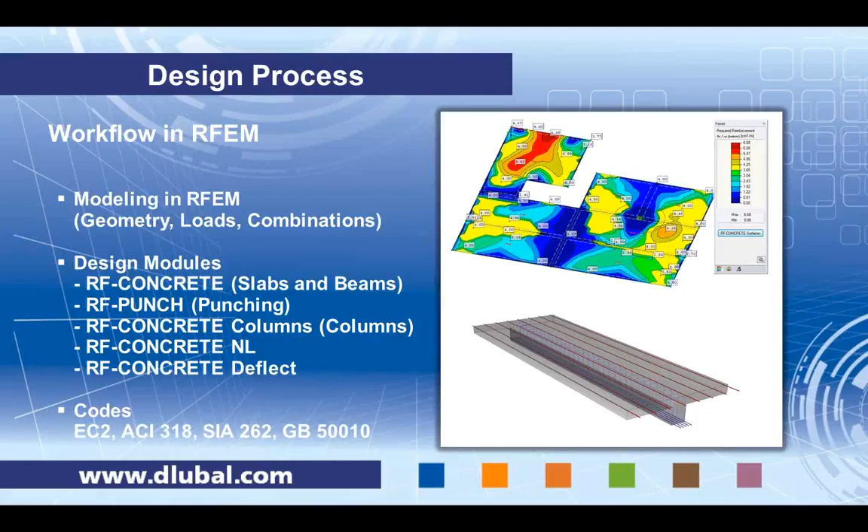In the concrete design modules, we have the following codes available: Eurocode 2, ACI 318, which is the American code, SIA 262, which is a code from Switzerland, and GB 50010, which is a Chinese code. Other codes are in preparation and will be published on our website when they are available and finished.

I would like to go now into the demonstration of the module itself, in a live demonstration in the software.

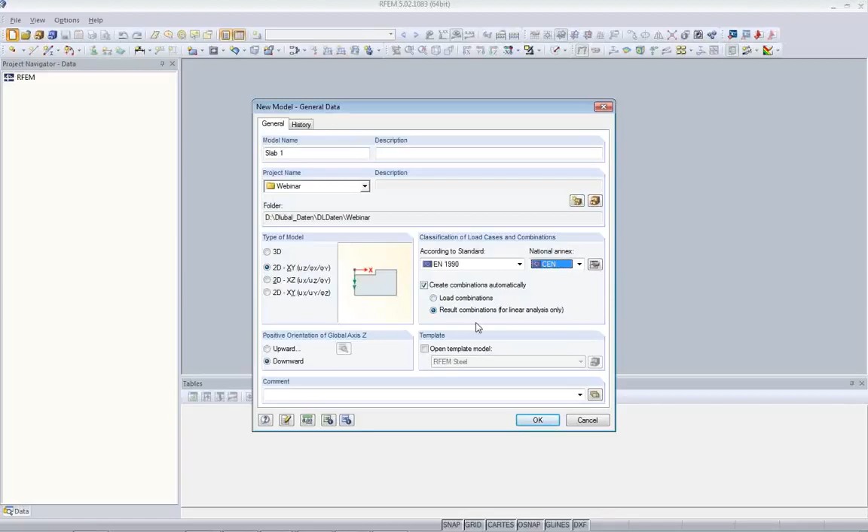To do this, I open a new structure inside RFEM, and I'll have to enter a model name. It will be a 2D model, according to Eurocode EN 1990, especially the loads will be according to Eurocode EN 1990, and we'll use the general settings for the national annexes throughout this project. We'll create combinations automatically according to this code, and we'll create result combinations, which are linear superpositioned results of the individual load cases.

Now I can import the background layer. Either you can use File, Import, and you see here DXF format, import as background layer, or you can also go to the Data Navigator and use the Guide objects, where you find background layers.

Right click on it and create a new background layer. I'll import one DXF file I have prepared here as a background layer, and you can name it as you like, sketch from CAD.

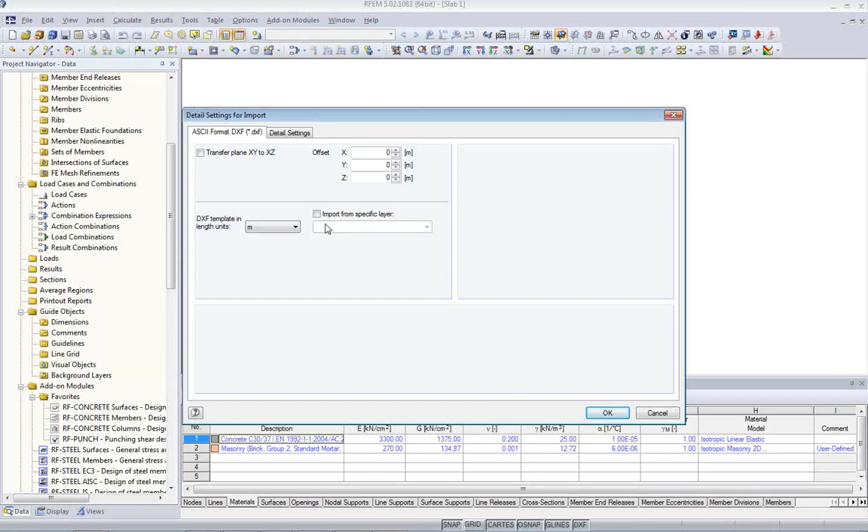You also have the option to import from a specific layer that you can select here. You might have drawn already certain lines inside your CAD application that you might want to use for your boundary lines or surfaces, but in this case I import all the lines that I find here. I click OK, and you'll see the outlines of the slab already in the background.

These are not real lines. I cannot touch them at the moment.

Now the situation is such that my actual structural system will not go all the way to the end of the wall or to the outside of the wall, but may already end in the center of the wall. Often, as the structural boundary, we use the center or middle of the wall where the slab is placed.

So how do we do this? I can now use a tool called Set Parallel Line. With this Set Parallel Line tool, I can create a line that is offset from a line that I pick in this background layer. The offset I use here is half of the wall thickness, which in this case is 18 centimeters.

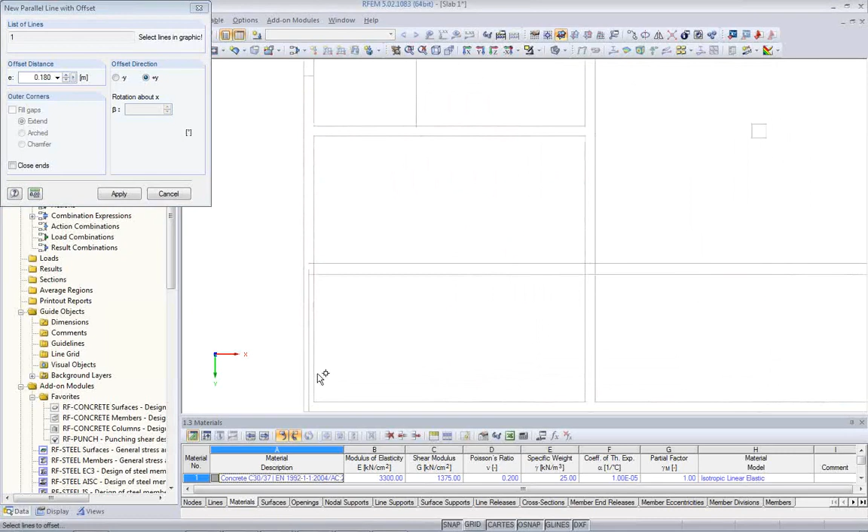Now I can start clicking on the line, and you see in the center of this wall a line is created.

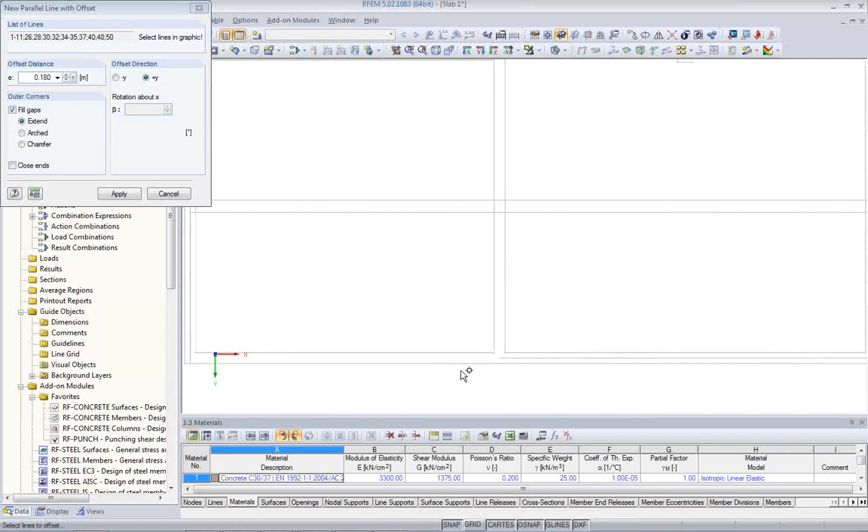I can now simply click on all the wall edges that I have in my template and go around the slab here to quickly grab the geometry of the structure from this background layer. So I do not have to use any printed plans or manual drawings, calculate coordinates and so on. The software is helping me here.

One more here, and then I have a pretty good idea of my slab, so I have to make a few more adjustments. For example, here my drawing wasn't that good, so I can enter manually a line. I can snap to the existing nodes and create a perpendicular connection here. I don't need this line anymore, so I can just drag and drop the neighboring node there.

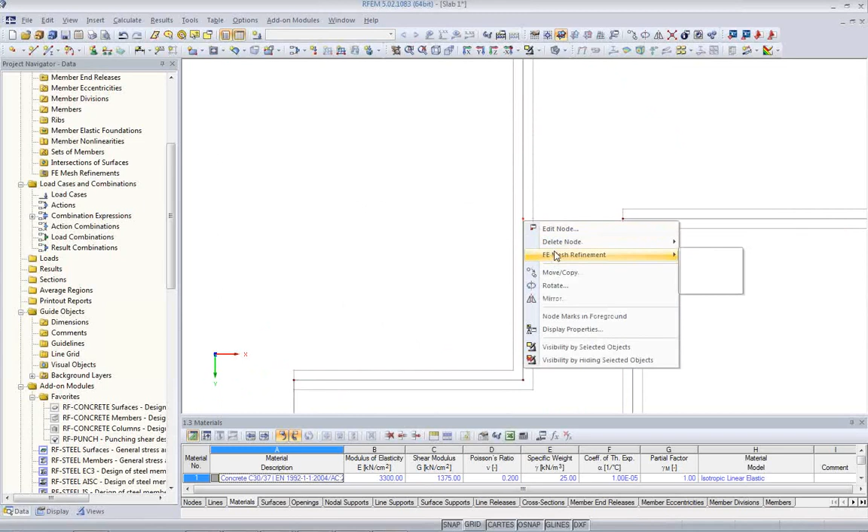So with a little bit of manual work, I can fix up my model here. Here also I'd like to have a perpendicular connection. I just drag and drop it to the next line and fix my holes here. Okay, here maybe there is a node that I don't like to have. I can delete this node and merge the joined lines or members, so out of the two lines, one line is formed.

Here again, I'll fix the little problems. This node I need, this node I need. Here it is all - there's a slight inaccuracy which often happens when you work with DXF files. So we can fix this very rapidly with the tools that RFEM provides.

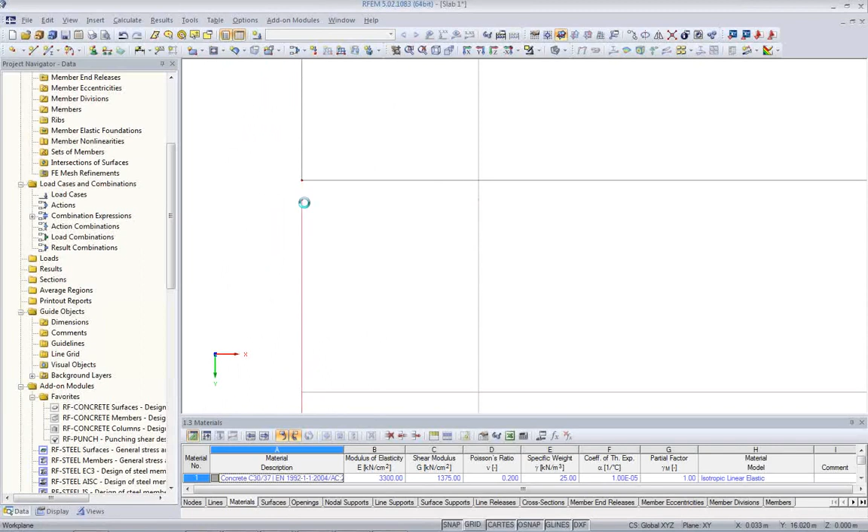Okay, here we need a little bit. And one more situation here. And we're almost done. Again, here there is some inconsistency.

One other thing is I have here certain rooms or offices where I would like to apply loads in separate load cases. So it's a good idea to create not just one slab, not just one surface out of this slab here, but create one surface for each room. That's why I create here a few more lines so I can draw basically my rooms... maybe I do it the other way. Hang on. So I have the correct boundary lines for the surfaces.

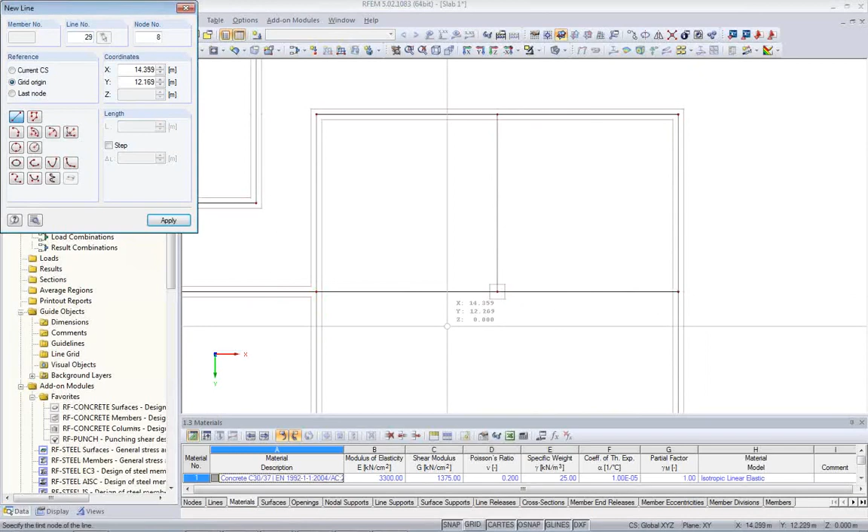Here we go, so once we are done, I can maybe delete this one node here. Once we are done, we can hide our background layer, and we can just either delete it, or we do not have to delete it - we can go to the display tree and just hide it. There's guide objects as well, and we just hide the background layers.

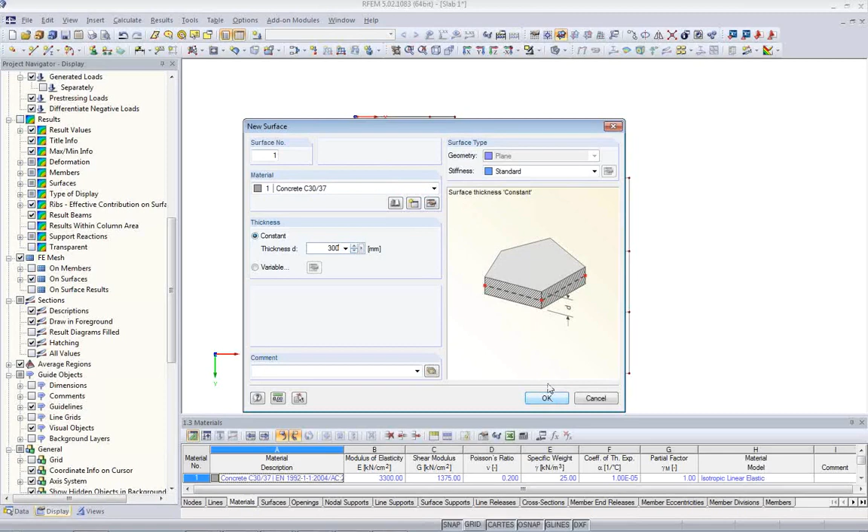Next, we'll have to enter the surfaces themselves. So I select the boundary lines. I have here already in this model a couple of materials - I'll use concrete C30/37. Of course, I can always pick something from the library that comes with the software. The thickness should be 300 millimeters, and it's a standard surface type.

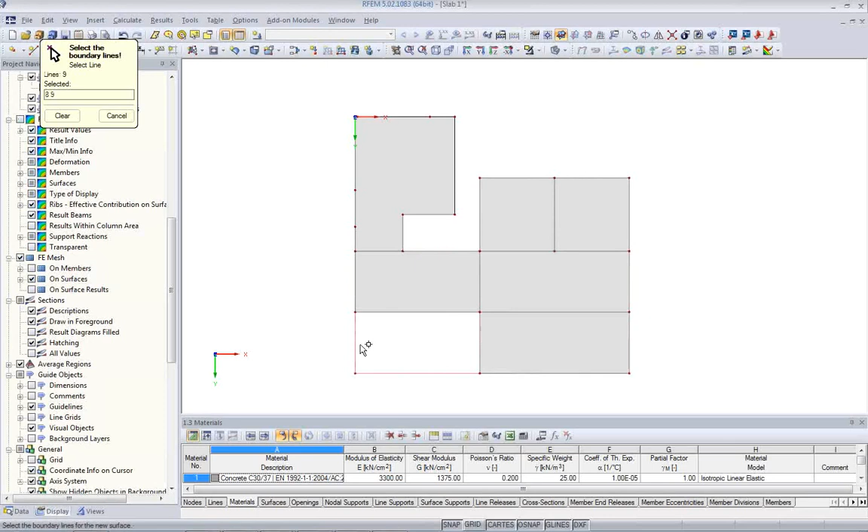I'll click on the boundary lines and quickly enter my surfaces one by one, and each surface represents one room that I might want to use later. Here we go, and we are done with the surfaces.

Next, we'll enter quickly the linear supports from the walls. I can either enter a rigid linear or hinged linear support, or as a specialty in RFEM, I can use a so-called elastic support via wall. This tool automatically provides the stiffness of the wall, and for this I have to enter the dimensions of the wall - the thickness is 360 millimeters, the height is 3 meters.

The material of the wall I can pick here, for example, from masonry. RFEM has in its library also the option to create certain masonry wall types made from brick and composed with mortar and all the parameters that Eurocode uses. So it's a lot of parameters you have to use in Eurocode to get the correct material parameters for the masonry used in the wall. From these parameters I can create the modulus of elasticity, the shear modulus, and so on that I need for an analysis.

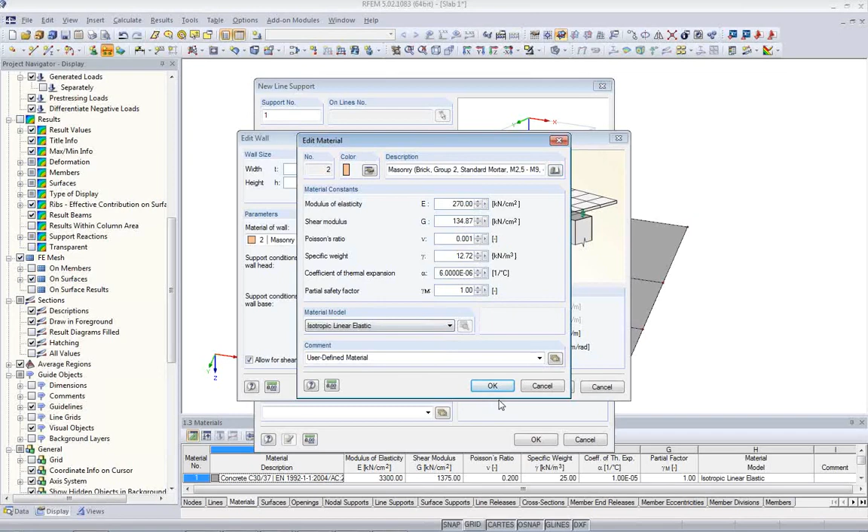I'll use a linear elastic material law for this, so I'm not using a nonlinear masonry material model. I also can address the support condition of the wall on top and bottom, and I will choose the hinged support condition. I see as a result the stiffness for the vertical support created from this wall with the specified dimensions. Next, I'll just click on the lines that are supposed to be supported - this one maybe not, I can erase it later.

And one more here. Okay—accidentally I entered the support as well here, I'll delete it.

Next will be point supports, nodal supports. I have a column in this area here, and here I have an equivalent way to do it. There's also the option to select column, and here I have to have the dimension of the columns, the height of the columns, and the material. This time I stick with concrete.

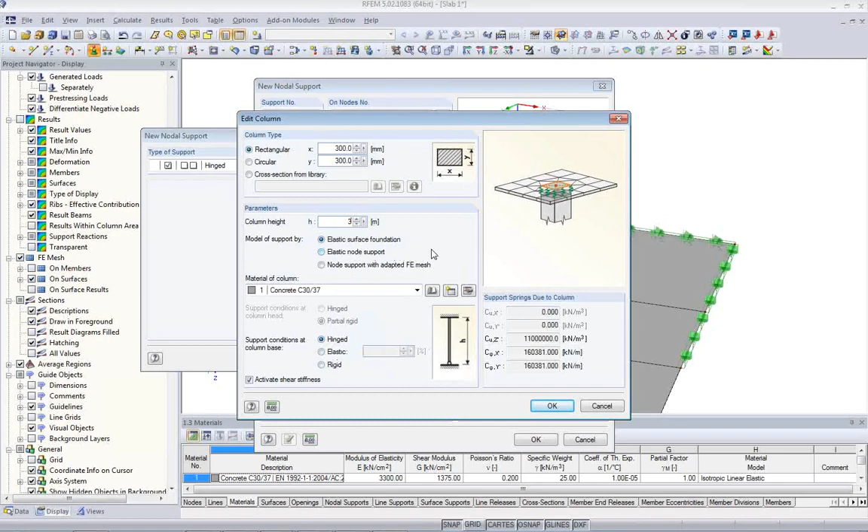It should be also hinged, and I can model it as an elastic surface foundation. That means basically the software uses a 300 by 300 rectangle for an elastic support underneath the slab, and this is a better model than if there would be just one node connected to the surface model. So we have a more a small area that is elastically supported, and that will help to avoid singularities later on.

Also at the same time, it will not show any results inside the column, which is more or less the column material, and it doesn't make sense to make a design there. And I get design actually at the edge of the column.

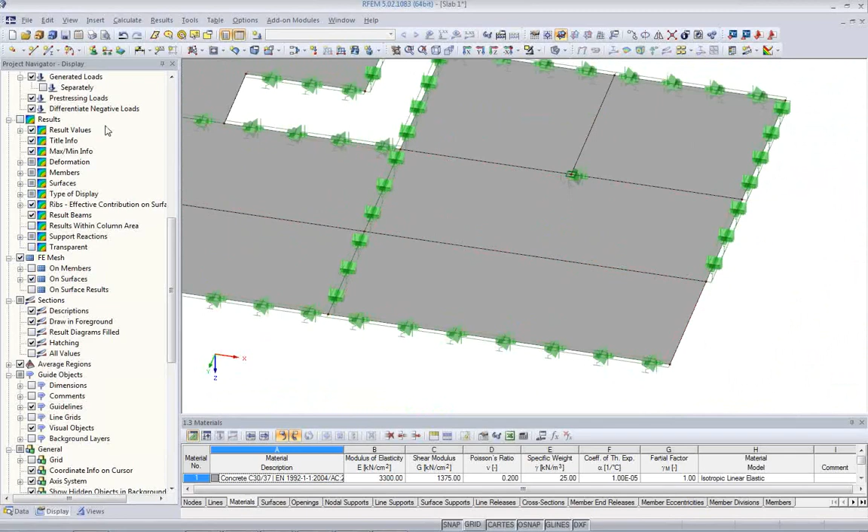Okay, I forgot to have a support here, so I quickly—actually I can just drag and drop it, Control and left mouse key pressed, and then drop it to the next neighboring line. So now everything seems to be all right.

And we are about ready with the model. Finally, I need to enter the beam that helps to support that wide span here of this surface.

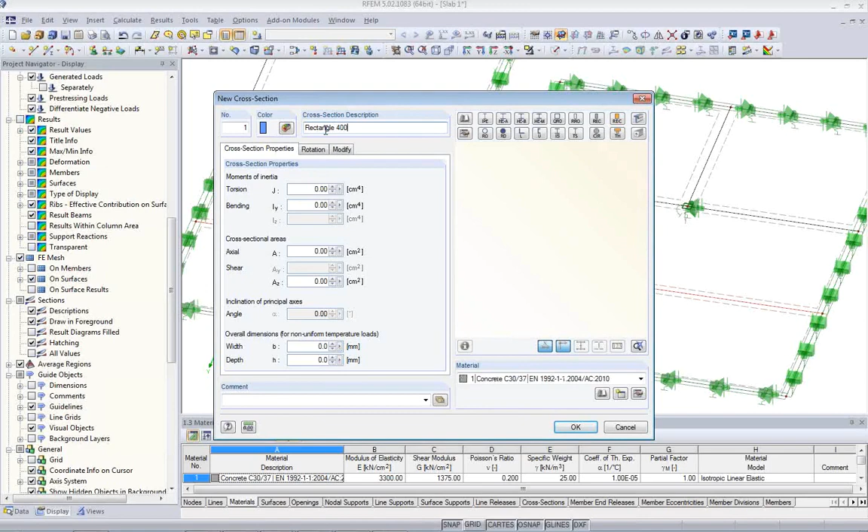For this I select the lines, enable or make a member available, and for this I need a cross section. I enter here rectangle 400 times 600, made from concrete as well.

And as a specialty here, I'll create a so-called rib. A rib will place the cross section, the rectangle, below the surface, and I can control it here with these radio buttons. Now the position will be on the plus Z side of the surface.

At the end I will get internal forces from this beam composed of the part of the surface and the beam itself, the rectangle cross section below. And I have to specify the effective width of the part of the surface, and I can do this here with the effective width on both sides.

So the software will then integrate the internal forces in the slab into 1D member internal forces together with the beam, the eccentric beam that is located below the slab. We will see the forces then later as beam forces, and we will also design this T-shape in the member design of RF Concrete Members.

I can also take control of the rigidity, stiffness of this part, of this beam part below the surface, because in cracked situation, the torsional stiffness of the beams are reduced pretty much. Often in standard practice it is so that you reduce the stiffness of this beam when you analyze the internal forces. I'll leave it here for 100%, but I just wanted to let you know that you have this option.

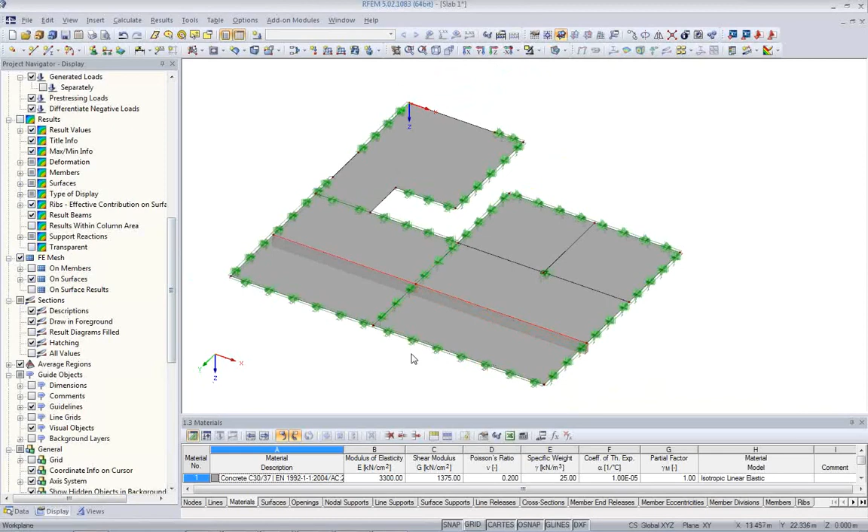First of all, I'd like to show the numbering of the lines and of the surfaces, because those will then also show up in the tabular output of the printout report. And I'll print this picture to the printout report.

This should be maybe 50% of a page, and I'll click on OK. And the printout report template I'm going to use will be from one that I prepared before, RF Concrete 2D.

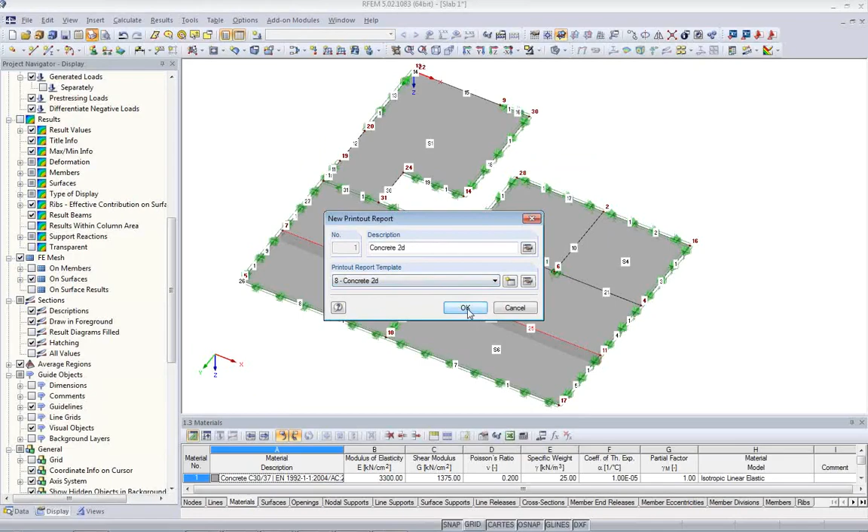We see a short preview of the printout report with all the tabular input and the picture that we just printed. So everything that I entered now is here already in a tabular format, and it's documented for checking later on. You can maybe zoom it to 2 pages, which gives a very compact view of the printout report.

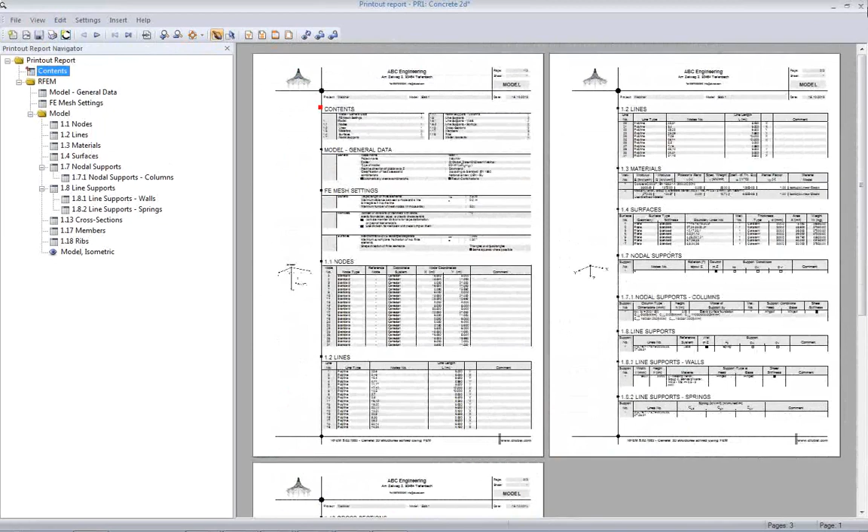Okay, once it's created, I close it again and I save it. Next, we'll have to deal with the loads and load combinations.

I can do this either here, create new load case, or I can do this in the tables. And in the tables, it's maybe more simple because I can just work like in the spreadsheet type, and it's quite quick. First load case is self-weight.

Second load case is some live load, and it has action category imposed office area. It will always remember the last input, so what I have to do now is just enter quickly the other 8 loads. We have 7 surfaces, 8 load cases in total.

Okay, after this I have the next table which will sum up all the load cases in so-called actions, and I can select which design situations I would like to work with. For this example, I will use the ultimate limit design situation and the serviceability design situation, which is the quasi-permanent combination in Eurocode. After that I get action combinations. Load combinations will stay empty because we work with result combinations.

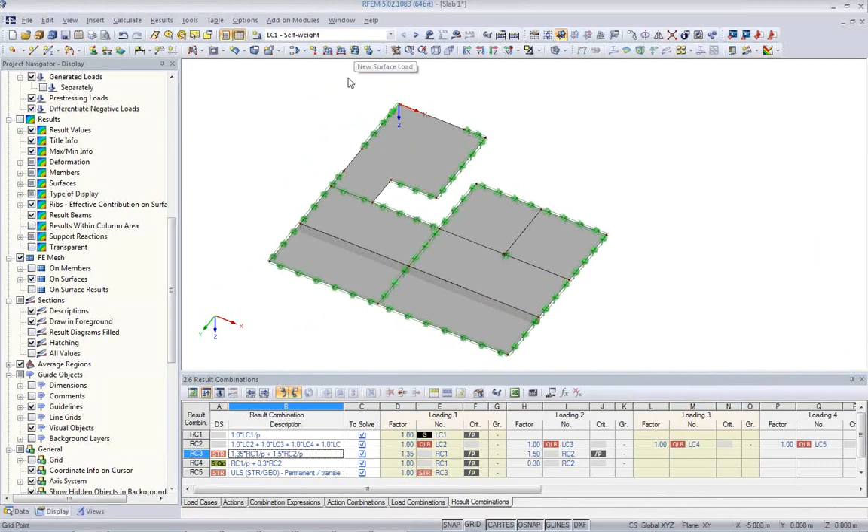Next will be the loads itself. We'll create a new surface load for the self-weight load case, 2.5 kilonewton per square meter, going to all the surfaces. Next will be the live load, 3.5 kilonewton per square meter on each surface individually per load case. I can just change the load case while I'm still in the entering mode of the load itself, so this way I'm rather quickly entering those load cases.

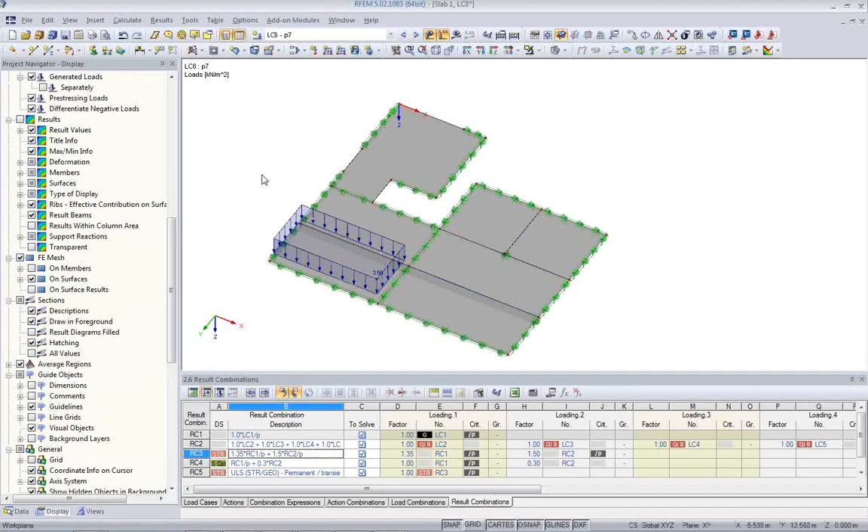Last but not least, I will take a look at the mesh generation parameters before I run the calculation. In the mesh settings, I set a target length for the finite elements of 500 millimeters.

If I work in a 2D plate XY structure, I have an additional option that allows me to make a finer mesh along the edge of each surface, and you can control it with this parameter here. This is a good idea because where I have the linear supports, mostly at the edges, I have large gradients of stresses, especially for shear forces, and it will somewhat condense those extreme values closer to the edge, inside of the wall.

And they will not be disturbing the design later on in RF Concrete Surfaces so much. Okay, and I do one more mesh refinement that will be done in the area where I have the point support.

Here I can just select the node, right mouse click, finite element mesh refinement. I create a new one. I'll use a rectangular type, and I'll take over the default parameters which fit very well to the dimensions of the column, with 0.5 meter at the moment.

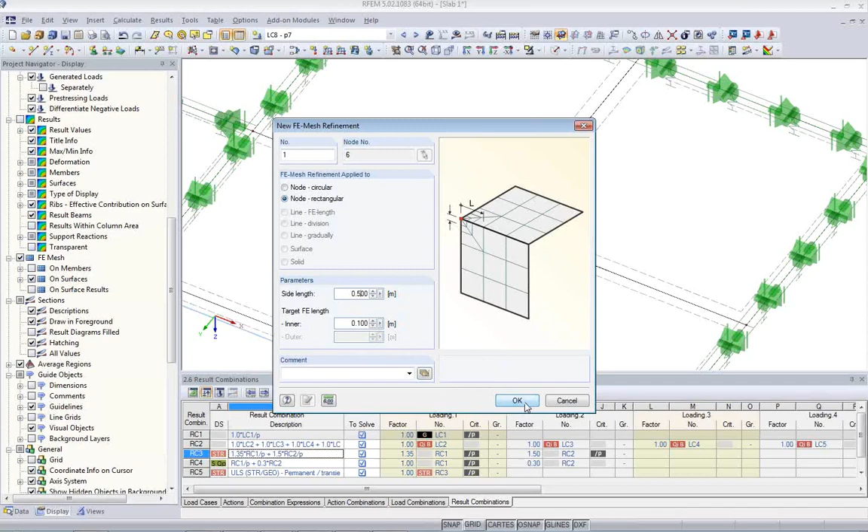Inside there is a finer mesh, and on the outside there will be actually the target length of the global FE mesh that I just said before. So there's a good transition from the finer mesh to the global target length of the finite element mesh.

Okay, with this I can start the analysis, so I can calculate all the results. Mesh is created automatically in the background, and I'll see for each load case now first the deflections.

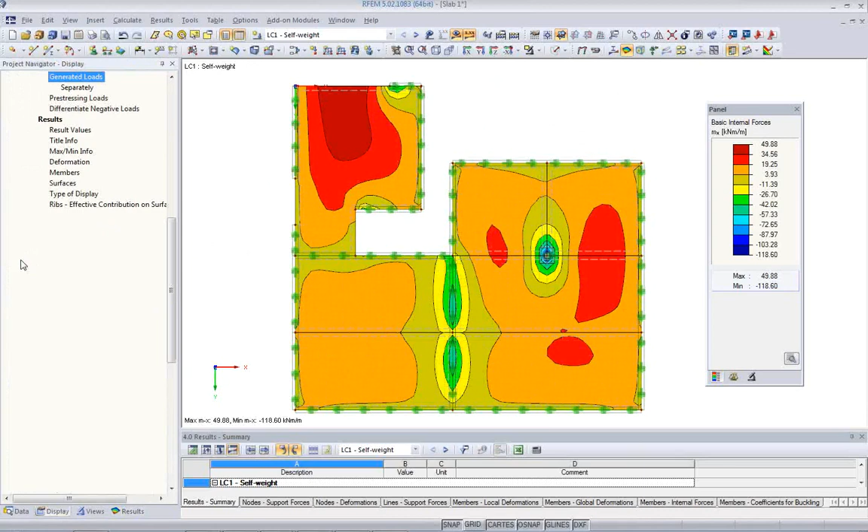I can also view the internal forces, maybe in the top view. I can now also control, like if I want to see the finite element mesh or not, if I want to see my supports or not. I can maybe hide the support lines because I don't want to see them now.

I'd like to see the results. Okay, this picture now is good for documentation. I need my internal forces to put into the document. So how to do this?

I have here the panel that indicates the magnitude of the forces, and how to do that. I can print and use the mass print option. In the mass print option, I scale it to 50%, and I have the option to control the results of maybe selected load cases.

Maybe I only want to see my final results, the ultimate limit and the quasi-permanent results in the envelope. And I click OK, and I want to see MX, MY, MXY, the shear forces, everything I want to have in this protocol. On OK,

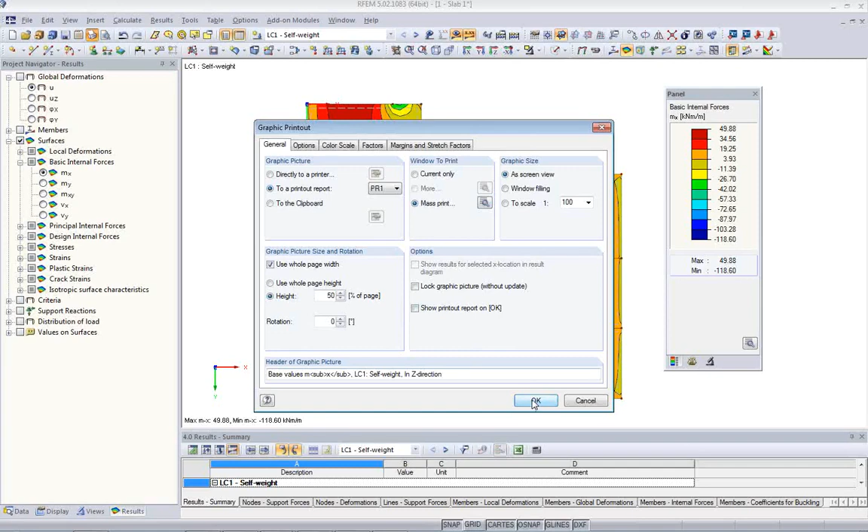I then check show printout report, on OK. I disable it because I don't want to always open the printout report. I just will drop it in my final printout report. And I click OK, and RFEM then dumps it into the final printout report.

Also of interest is not only the surface internal forces, but also the support reactions. I enable them here, and you see that you can't see them because they are drawn below in direction Z. How to fix this problem?

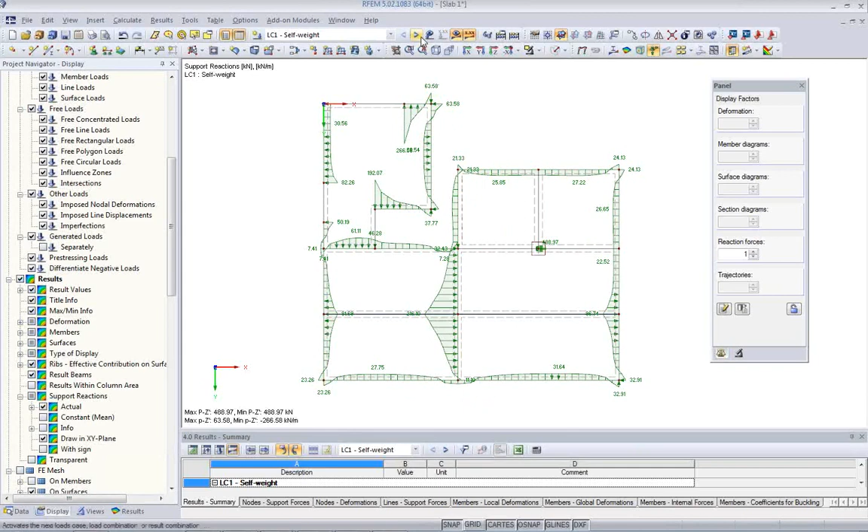RFEM has a specialty that for 2D surfaces, it can display the support reactions. It can draw them in the XY plane. So I can kind of swap them over, and then I see the support reactions here in a much better view.

Often engineers do not work with the real lines of the support forces because when there is a masonry wall, the force transfer is not one-to-one from the support of the slab down to the next wall below. There's some kind of distribution depending on the stiffness of the material used for the walls. So in many cases, it's also suitable to work with smoothed, mean, constant forces.

So what we do is we integrate all the support forces along the line and average them to a mean value. This is a good way that you can use this information also for a load on the next story that you have below.

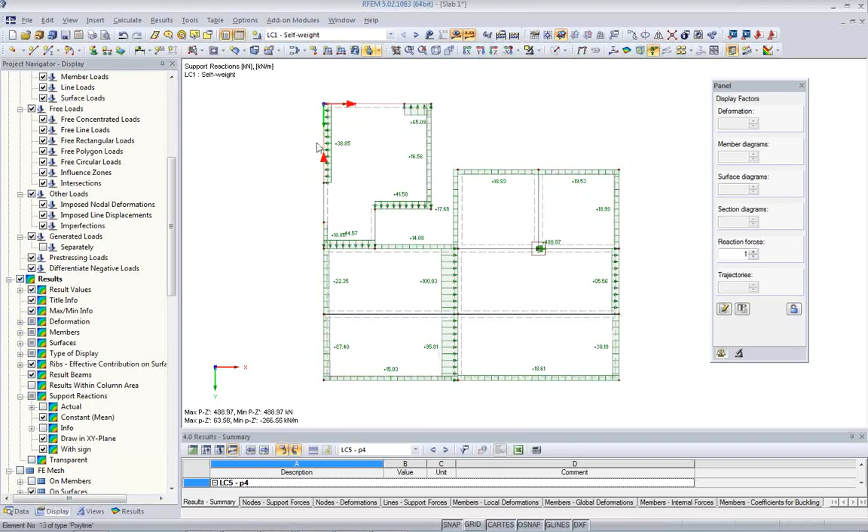So this type of picture I would like to print also in the printout report. I use again the mass print option. I'll click on detail setting, results, and this time I'm enabling the support reactions and local P-Z' reactions, line supports, and also the nodal supports.

I don't want to do it for all the results, only for the individual load cases, because when I keep on calculating with those forces, it's a good control. Also, I might have to apply different safety factors, so the result combinations really don't help me much if I print them. All images of all load cases are printed in this way.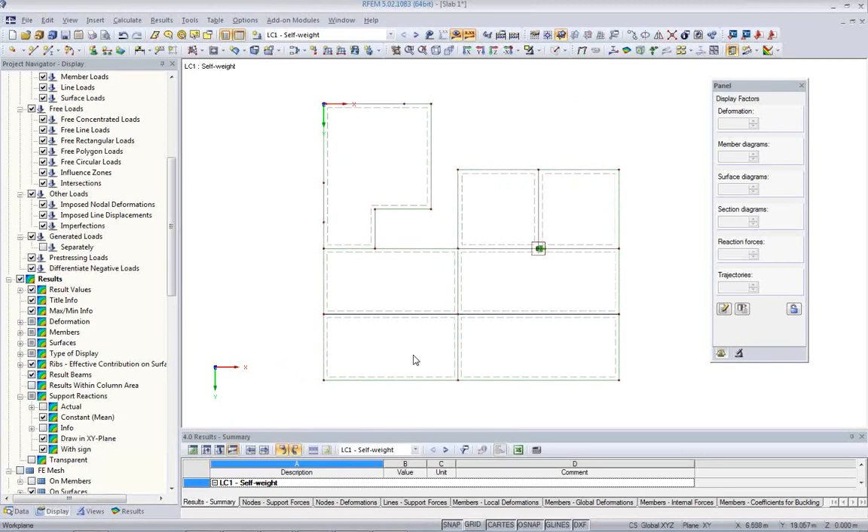Next picture is maybe the member internal forces that I have to take a look at. If I look at my internal forces here, I can see beam forces, bending moment, shear forces, torsional moments, and so on that come from the twist introduced by the slab.

I can print also this result, but there is another good way to document it: the so-called result diagram. I can use this result diagram and print all my forces, maybe also including the deformation, into the printout report. This time again I use the envelope.

Maybe we stick with the bending moment and the shear force. Maybe we add the torsion. We print this to the printout report, and I will use an entire page for this.

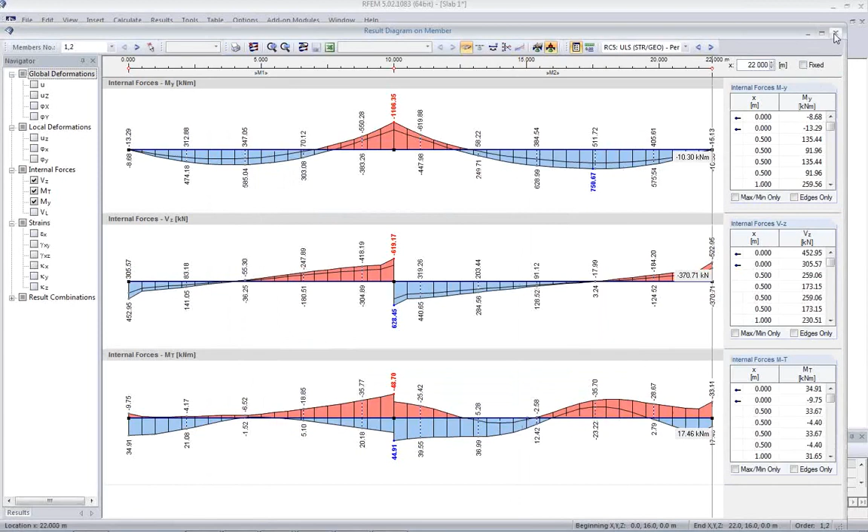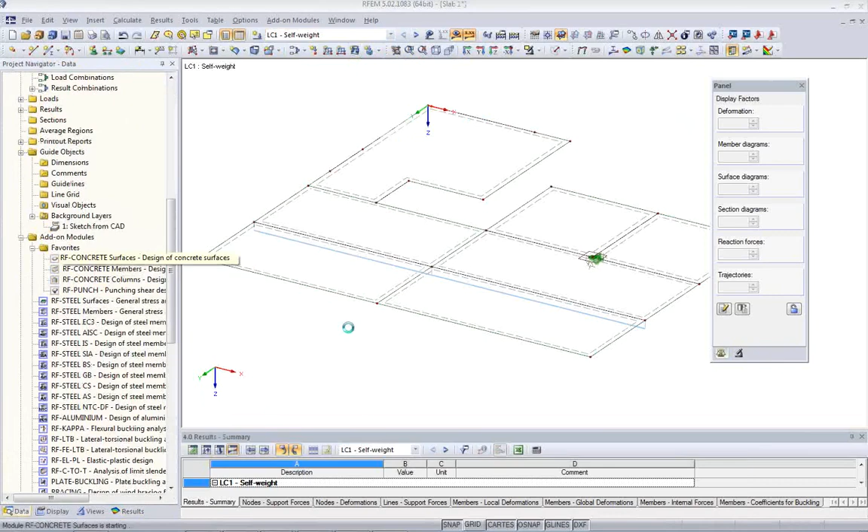Now we have already done all the internal forces, support reactions, bending moments, beam results. Next, we'll go to the concrete design. Here we'll first use the module RF Concrete Surfaces, which will design the surfaces. We'll use for the ultimate limit design the result combination 5, which includes the envelope of all results of all individual combinations.

We use Eurocode with the general standard settings of the Eurocodes. For serviceability limit state design, we use the quasi-permanent combination. We can check the materials, which are just taken over from RFEM.

In the surface pane, we'll see a list of all the surfaces, and I have different options here to check. First, we need to check the stresses. This is part of the serviceability check, the stresses for the concrete that takes over the compression. Regarding the code, there are certain settings that limit the compressive stress, and you can just choose them.

Everything is set up by default, so in general you wouldn't have to change anything. Also, stresses have to be limited, for example typically to 80% of the yield stress of the material. If you want to, you can set those settings individually for each surface.

The next thing is the crack width control. Here I have to define, first of all, what is the limiting crack width. It should be according to the exposure class, and in this case I have XC1, which will result in 0.4 as the allowable crack width.

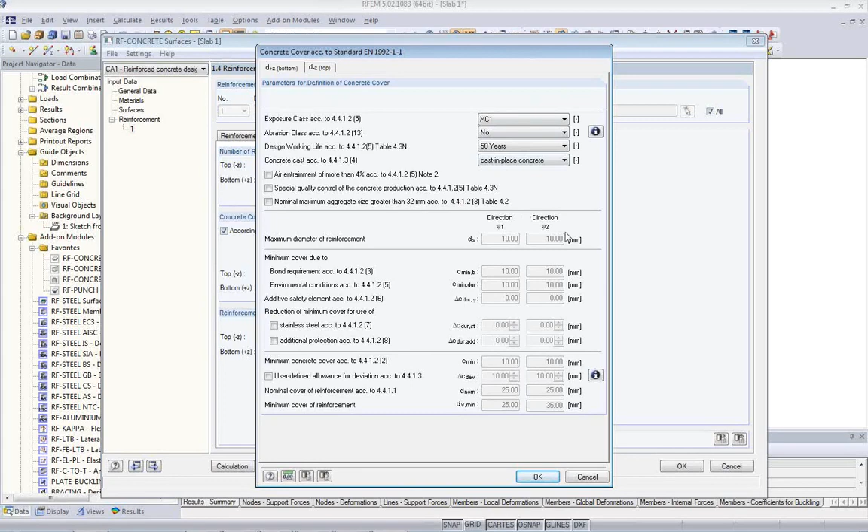The reinforcement layout is done in the second tab, where I first have to define the concrete cover. I can pick it from the exposure class of the code, and it can differ on top and bottom of the slab, since one side can be exposed to the outside and one to the inside, so you have different concrete covers to check. From these parameters, RFEM or RF-Concrete calculates the required cover.

For the longitudinal reinforcement, I can already set a basic reinforcement, which I will do later, but first I want to have a first run of the analysis and see what situations I have.

In the next tab I can check whether I need minimum reinforcement. This is the ductility reinforcement basically, and the minimum longitudinal and minimum shear reinforcement, which is also required by the code. There are several safety factors we can address due to the type of loading, whether it is persistent and transient, accidental, or serviceability. Those are actually national annex parameters and will be set according to the national annex you choose.

Okay, those are the most important topics I would like to point out. The national annex parameters can be shown down here. You can change them and set them up differently if there are changes in the national annex or whatever.

Also in the details you have an option for which internal forces you use for design. Remember, we have a beam that already integrates part of the internal forces from the slab, and I'll get a design for this T section. So this part of the slab that's already part of the design in the beam, I do not have to apply for this surface design, at least in the direction of the longitudinal direction of the beam.

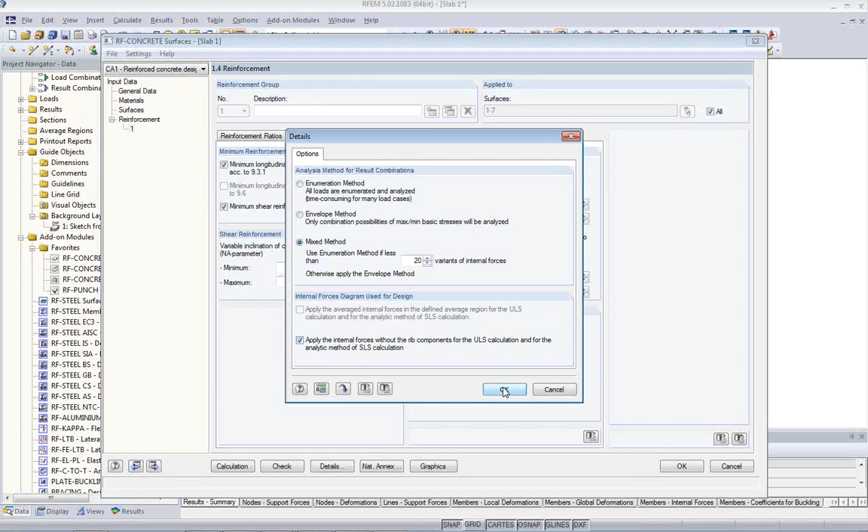That's why I check this checkbox here, and I will not use it for the surface design. Otherwise I would get reinforcement from the slab design and reinforcement from the beam design, and that would be double, and I don't want that. Okay, now I'm ready to run the analysis and get a first idea about my reinforcement.

We have a required reinforcement of about 20 square centimeters per meter on the top, in the second direction, and on the bottom in two directions. We also get an overview of the serviceability design. We'll see here there are some problems as well with cracking and also with concrete compression.

Let's take a look where we have those problems, and I go to the graphic. We get first the display of the required reinforcement on the top, then on the top in the other direction. Note here the direction is indicated by these little red marks. Then we have the bottom reinforcement in one direction, and the bottom reinforcement in the other direction.

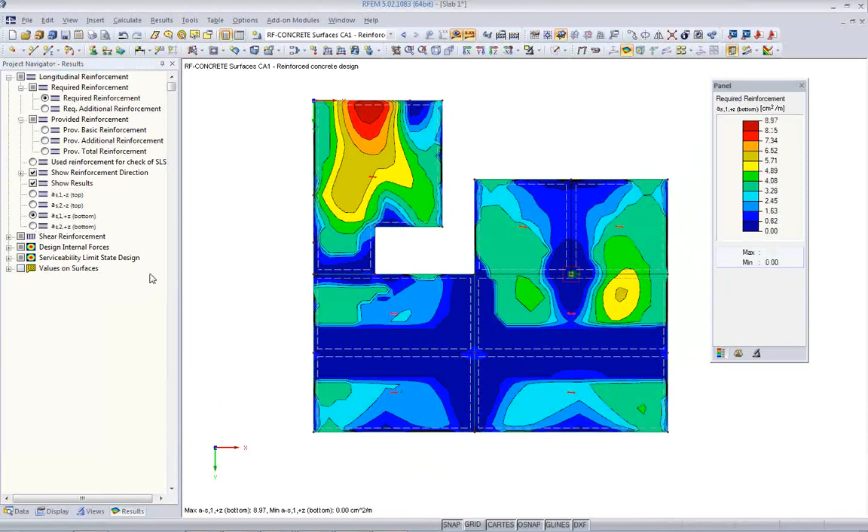We see here that the direction longitudinal to the beam takes out pretty much of this reinforcement where we have defined the beam. RFEM knows that there was 1.60 meters left and right of this beam, and this section will be part of the beam design.

Okay, let's take a look at the content of rebars we need. If you see the blue and greenish areas, we're talking about 4.8, 4.08 square centimeters per meter. So if I cover this with a basic reinforcement, I would have only a few spots where I'd need additional reinforcement, for example here. If I look at the other direction, with 4 as well, the green parts would all be taken care of. So for the top reinforcement, about 4 would cover pretty much of the dark blue, with only a few spots left.

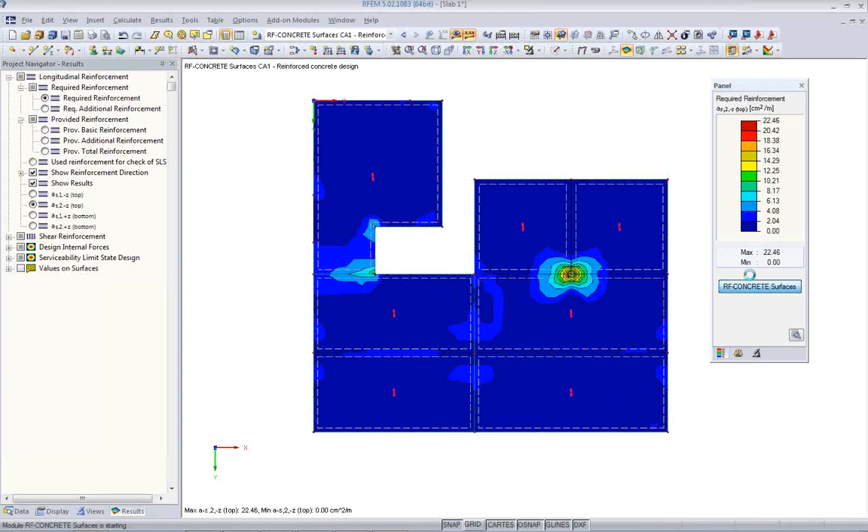So I'm trying now to add a basic reinforcement on all the surfaces. Go to the reinforcement layout and longitudinal reinforcement, and here I can enter an existing provided reinforcement. I pick a diameter and a distance, and I'll get the content of reinforcement shown below. For example, I can use a 10 millimeter bar every 200 millimeters, which gives almost 4 square centimeters per meter of reinforcement.

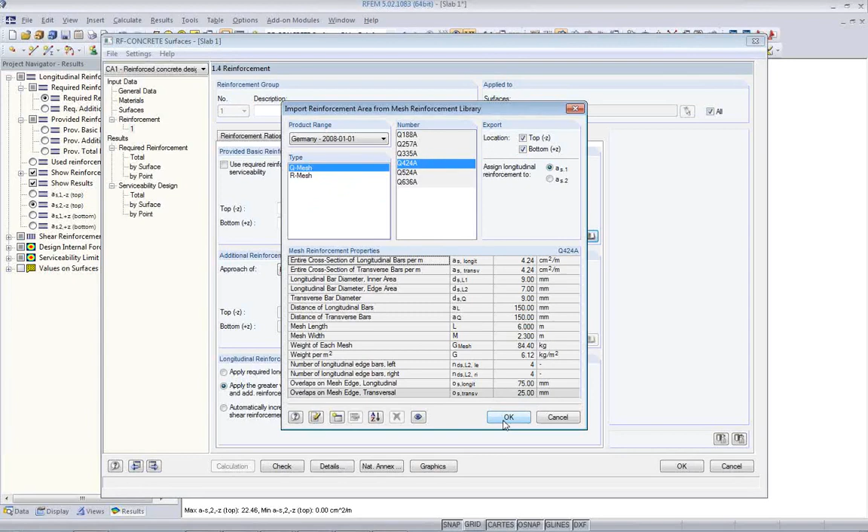Or I can use wire fabric that I can buy, maybe cheaper or easier to mount, using some quadratic wire mesh for top and bottom. I'll use this already for my design. It will play an important role for the serviceability check as well, because the diameter plays a role here, and I already have an existing reinforcement there.

Okay, I run the analysis again, and now I have different options to display my results. First of all, I have here a little bit less, well, required is the same, but I have here additional required and required, so there's the difference here. This is the basic reinforcement.

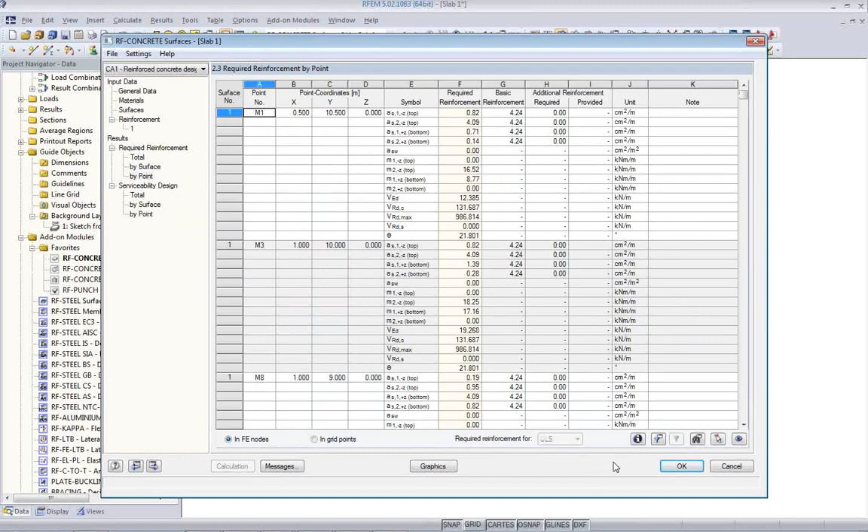I can look at these results also by surface or by point and so on. If I want to, I also can look into the design details. So for every mesh point, I get an enormous amount of detailed results that I can use to check my analysis if it is correct. So if there is one question, one doubt about the result, I can go there and I get all the results, I get all the details.

So for every mesh point on the structure, or for every grid point actually, I can get those internal details. And we have a very powerful way to really see what the software is doing internally.

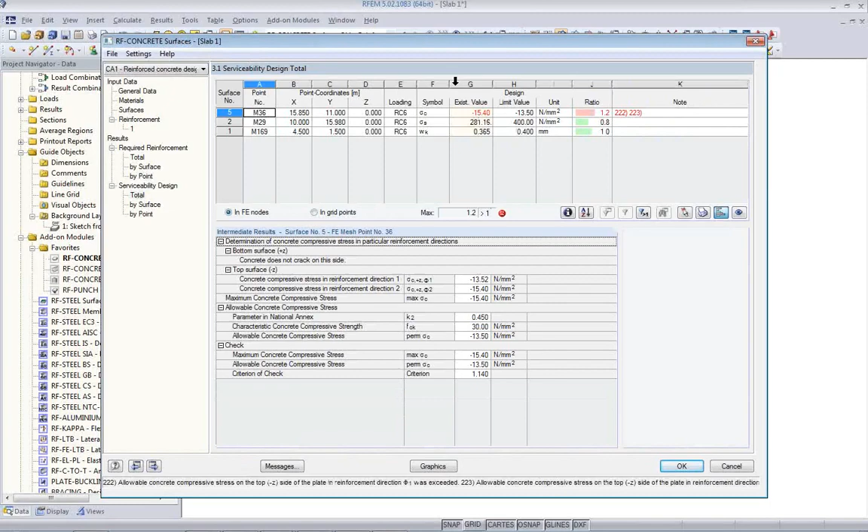Okay, and the same is also here for serviceability design, and I see here, okay, with the crack width we are fine. There's only a small problem left with the compressive strengths, and if I click on here, I see it's here where I have a punching problem actually at the end, and I will have to do something anyway with it, but maybe I can just neglect this part here for now.

When I go to the graphics, I have now additional options. I can show first of all the required reinforcement, what we've seen before, but now I can also say I want to see the required additional reinforcement. So it shows me the difference of what I have provided by a basic reinforcement and what I have to add additionally. So here, this is for the top, so there's pretty much nothing, just at this point we have to think about doing something, and here we'll do a punching check later on.

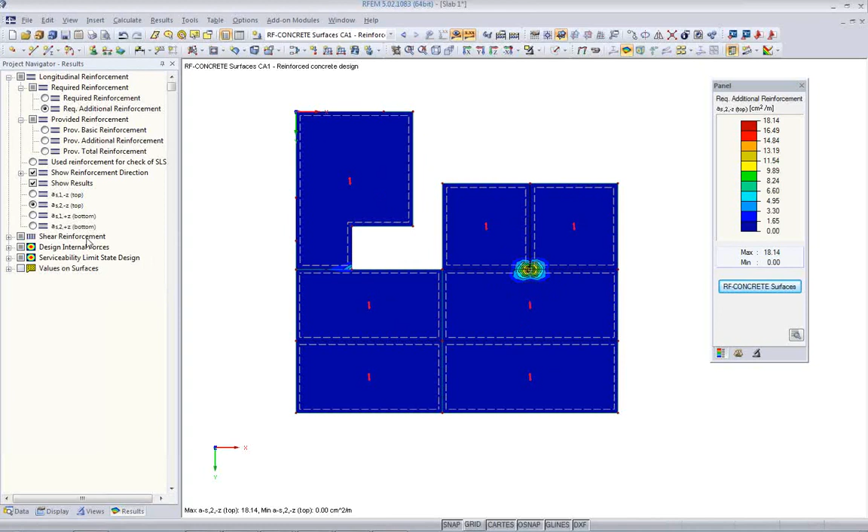And on the bottom, here I have maybe in this area I need to have extra reinforcement. Here is a small area, but there's only about 1.292. Maybe if I add a little bit more on the basic reinforcement, after all I have not to do anything here anymore. And the same thing is in the other direction.

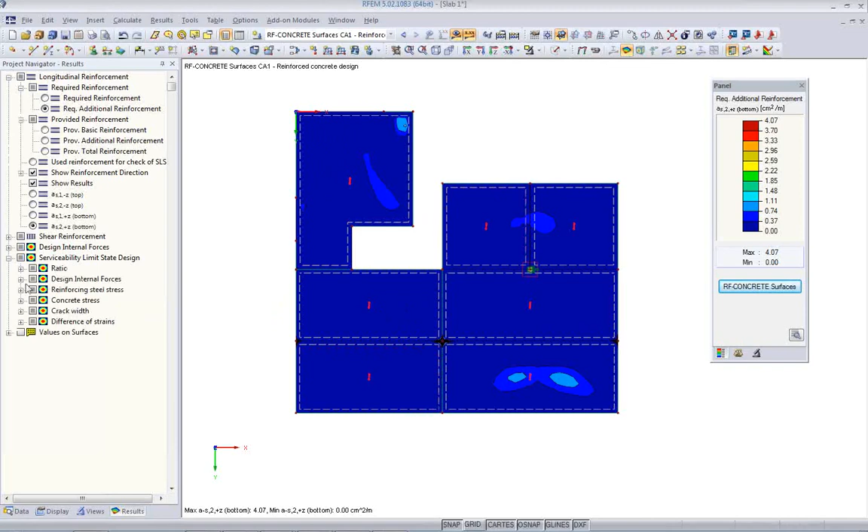When I take a look at the serviceability, I can check my concrete compressive strength, stress, and I get a ratio. If it's greater than 1 and it's exceeded, if it's smaller than 1, it's fine. So we have the yellow parts are pretty much okay. The steel stresses are okay overall, and I have my crack width.

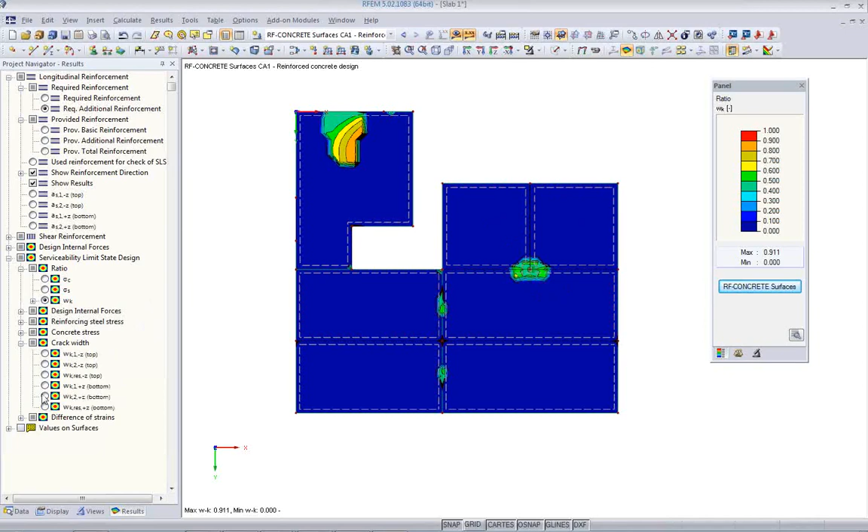So I have only cracking that appears here, a little bit here, it's not surprising, over the wall, and of course here, but this part again we have to take a closer look later. Also I can check the crack width on top and on bottom, maybe on bottom in direction 1 and bottom in direction 2, and also the resulting of both directions can be shown.

Okay, I'd like to also show some values on the surfaces for printing, because we also want to print, of course, the results. So maybe it's better to reduce the values so that I get only one value per surface, the max and the min value. So each time I change the result, those values will be then also adjusted.

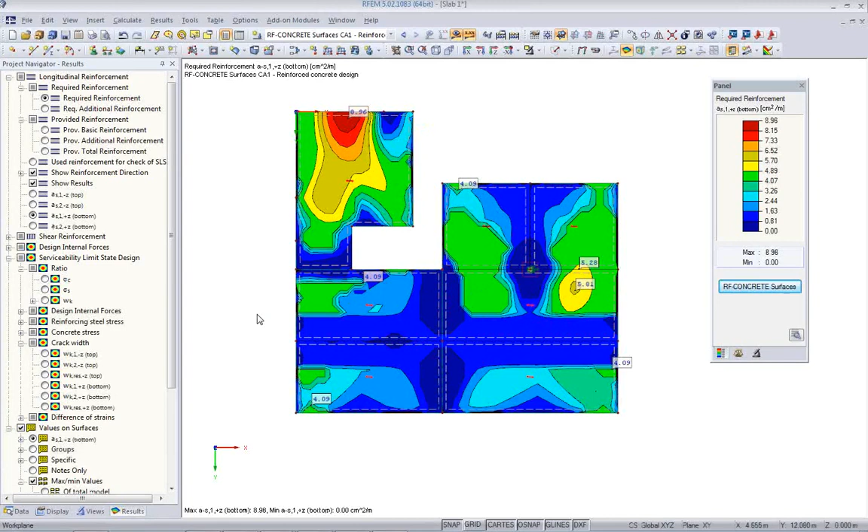I go to the reinforcement, maybe the required reinforcement, you get a nice view, also including some values, which reinforcement you have there. Okay, those pictures I'd like to print again.

So we'll print this picture. We use the mass print option. We'll use again 50% of page size.

And also for the concrete module, I have the mass print option that I show all the results, all the rebars or rebar content on top and bottom in all directions for all cases, and also the same thing for the required additional reinforcement. So all in all, it should be something like 8 graphs. I click OK, and I drop it again in my printout report.

So far about the design of the slabs. Next will be the design of the members of this beam here.

We enter the concrete member module, and we use for the ultimate limit, we also use Eurocode, and we use for the ultimate limit design the result combination 5, and for the serviceability limit design result combination 6. This time I also activate creep and shrinkage that we can use here for this beam.

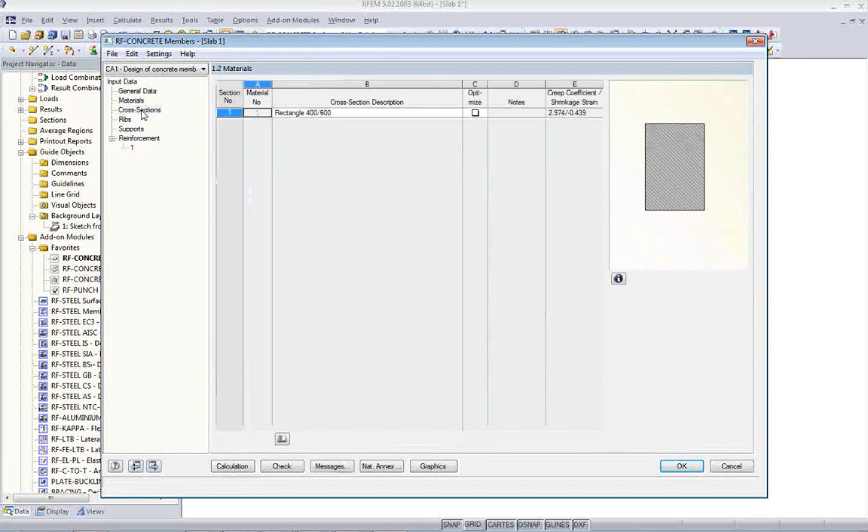Next we'll go through the materials, check the materials, check the cross sections. Next point will be ribs.

As I said, we use part of the surfaces for the member internal forces, and we entered it inside RFEM. So what we're actually doing is we're designing a T-section, and the internal forces come from the surface and the beam below it, and they are integrated into one member.

So the effective width is given here. You have the option to change the effective width in the design module if you want to. So when you have a negative moment or a positive moment, you can design a smaller cross section where there are cracks, for example, and a bigger cross section where the slab is in compression. There are various options you can use, and in the Eurocode there are some requirements regarding this.

I'll stick with the simplified method and just keep everything constant at the moment. Also, I can reduce the shear forces that are near supports, and I'll have to indicate where the supports are, and they are here at those points. I have to indicate whether it is an end support or an intermediate support, and I have to enter the width of the support.

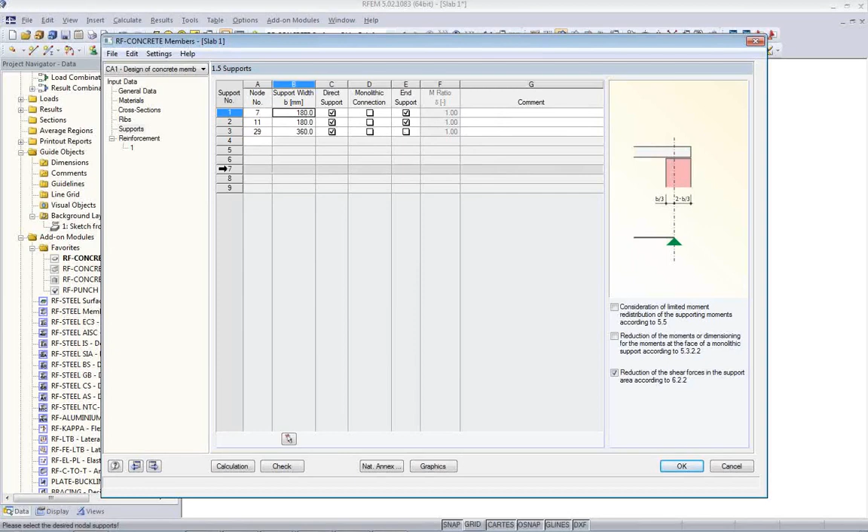So this will optimize my results. Next, I'll go to the reinforcement. We can now enter design which diameters are possible, so we choose 14, 16, 20 millimeters of longitudinal rebars. Same thing for the links - we can define which diameters we want to use there, and we can use certain spacing of links. There are certain options that you can use.

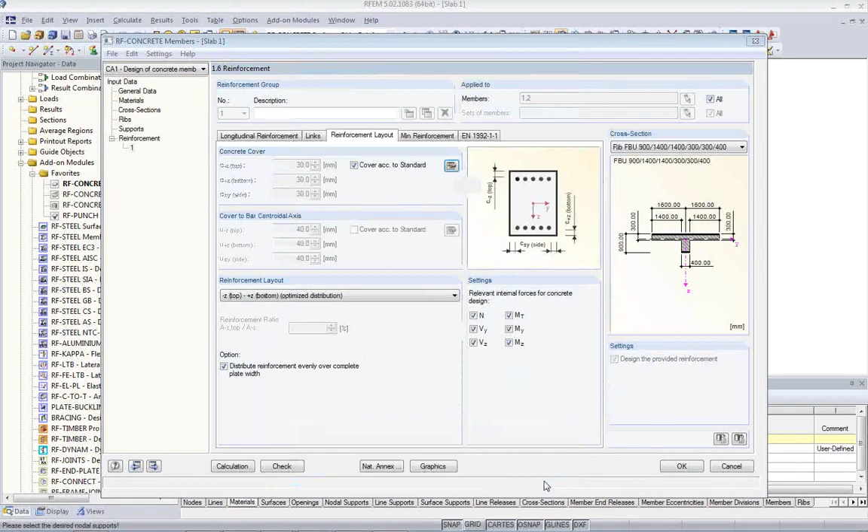Reinforcement layout is similar to the reinforcement layout we had in the surface model, where we, for example, have to define the cover of the concrete. I use again exposure class XC1. Minimum reinforcement and ductility reinforcement is taken care of, and I need to have the concrete cover setting as well.

With this I'll start my analysis and run the design of the beam. We see here first an overview again about the required reinforcement and the provided reinforcement, so you get a reinforcement suggestion that you can use.

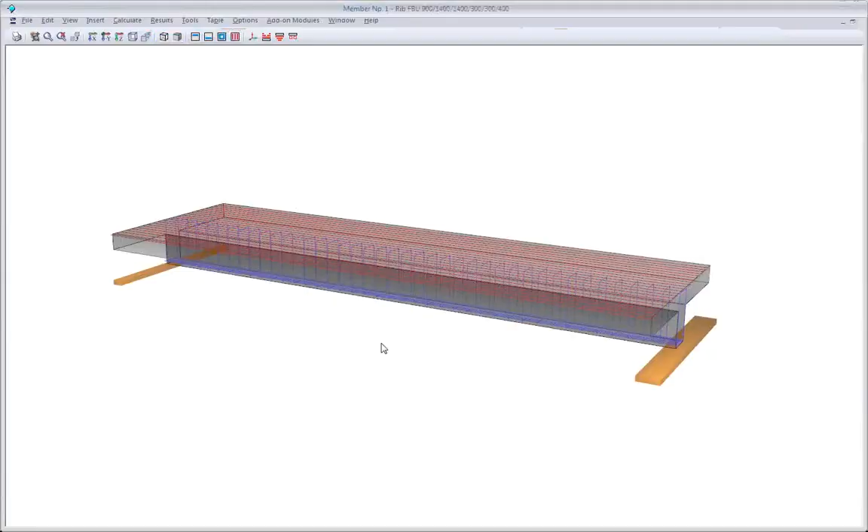We can also use a 3D rendered view that we can show, and we can print this to the printout report as well. Here I use again 50% of a page. Same thing for the shear reinforcement - you get here a sketch of the shear reinforcement that will also be part of the printout report.

For the serviceability check, we see here that we have actually a crack width of 0.2 for the maximum. The deflection is here, and everything seems to be quite okay. We can take a look at the graphics.

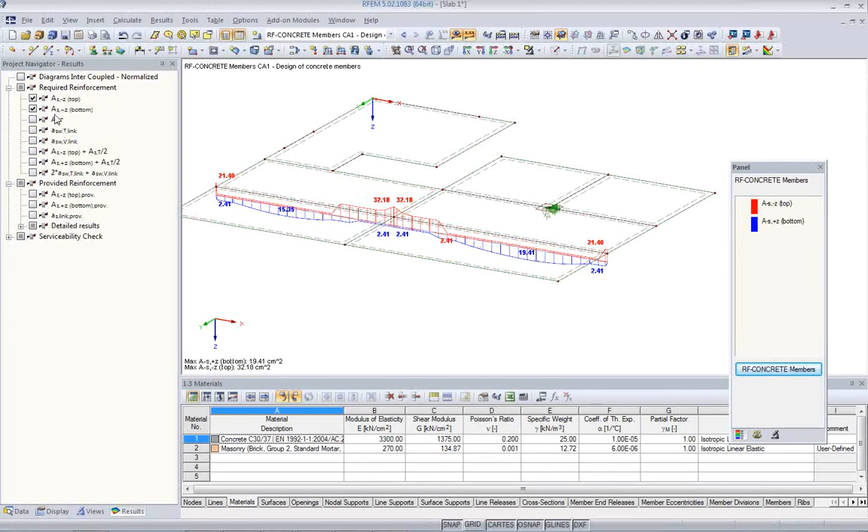I'll show here the graphic view of the beam, and we see here the top and the bottom reinforcement, as well as we can show the provided top and bottom reinforcement. So we see the software provided more than required, so we're on the safe side.

If you want to, you can subdivide those members and make it more individual along the beam. I can print also this picture to the printout report, 50%, okay, as screen view, and we'll print it.

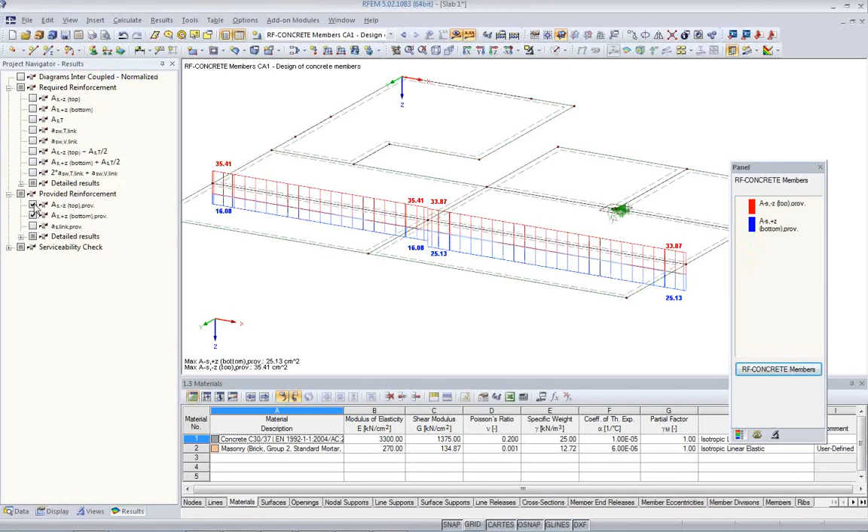Also, I can show my serviceability checks. We can see the compressive stress for the concrete, for the steel, the tension stress, and I can show also my - maybe I take 2 pictures, print this, okay - and then I print another one with the location of the cracks and the deflection, and print this as well.

Okay, this is the design of the concrete members.

After all, we can now maybe take a look at our printout report, and I'll just make a quick save in between, and then see how the printout report looks like.

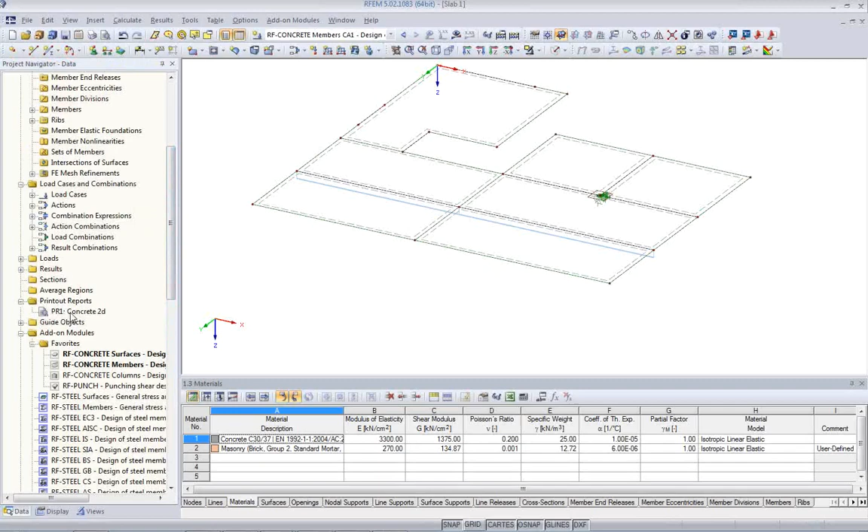I have the printout report here in the data navigator, and with double clicking on it I can open it. And we should see some more data as before. Okay, it takes some time to build.

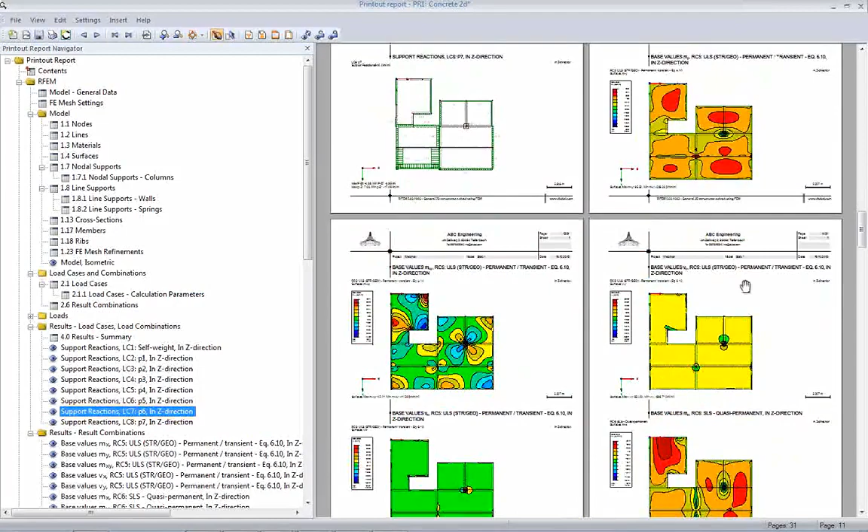Okay, so I'd like to view maybe 2 pages at once, and I can see here my support reactions that I printed before. I can see here also my internal forces that I printed for all the design situations. I see my internal forces for the beam.

All the tables that I have here regarding the concrete design, and I don't have results here of the concrete slabs because I didn't analyze those results, but the beam is here, and we see here the pictures that I printed individually just before I opened the printout report. Altogether we have 31 pages.

If I want to see the results of the surface design, I have to close it again, and I have to analyze the results of concrete surface as well, and then I should also see those results in the printout report.

Okay, let's open it one more time. And then I think we are pretty much also at the end of this demonstration.

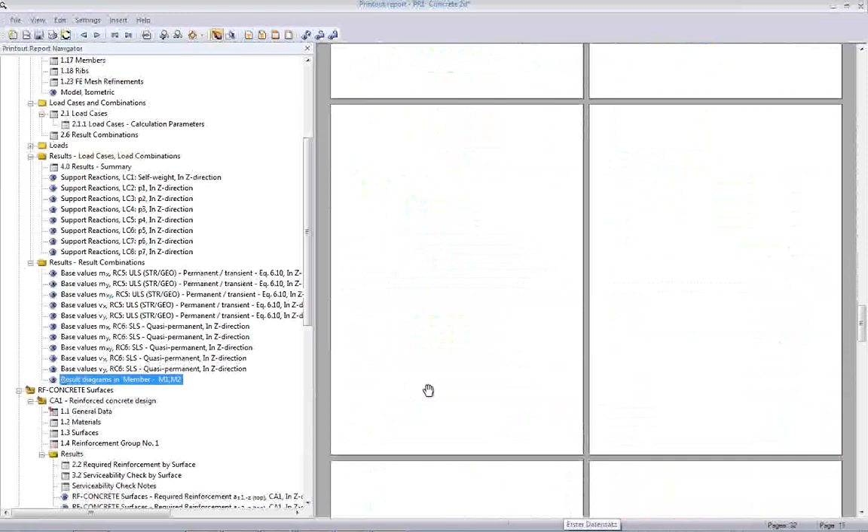So now let's see if we can see all the other results of the concrete design, RF Concrete. Here we go. It takes some time, it loads the results while we are navigating, and here we see also the reinforcement and everything. It seems to be clear here again.

I've picked some of the questions that have come in, and one that was asked several times is about the real deflection of the slab in the cracked situation. Everything so far was pretty much linear deflection, but if I want the real deflection of the slab in the cracked situation, I can do this with the module RF Concrete Surface, RF Concrete Deflect, which can be found in the surface module.

Therefore, I open the surface module, but we have to do a little bit of work beforehand. In the serviceability limit state, I can go to the analytical method, and I can see here deflection with RF Concrete Deflect, where I can also enable shrinkage, tension stiffening, creeping, and so on. This is a more or less nonlinear analysis, and I cannot use a linear combination of results in an envelope.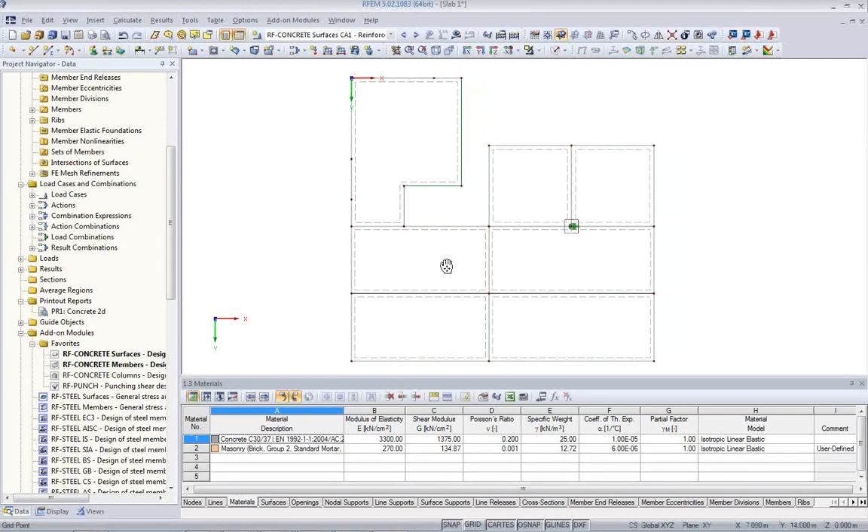Now, let's look at the internal forces, or the quasi-permanent results, and look at the deflections. You can see here that the deflections are biggest in the area with the wider span. That's kind of clear. Here it's not so bad, but here is the problem. So I have to find a load situation where this slab is mostly loaded.

And I have to make a load combination, not an envelope, not a result combination. So what I do now is use load case self-weight, which applies everywhere, plus the load that sits on this slab - load case 1 and 2. You don't have to work only with the fixed load combinations created by RFEM.

I can anytime create my own load combination with my own safety factors, and I do this now. That was the wrong switch. I create load case 1 plus a factor of 0.3, which is the typical safety factor for the quasi-permanent combination of the live load. Okay, click OK. Did I do something wrong here?

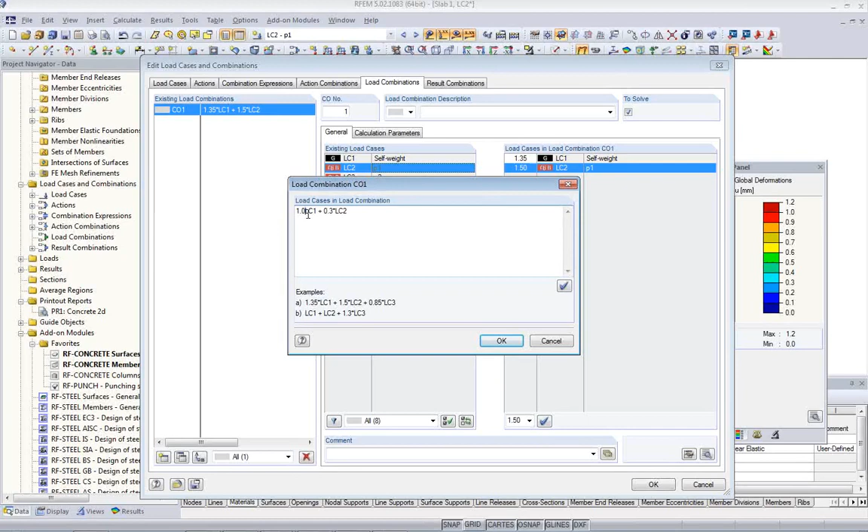0.3, and then here I need the delimiter. Okay, and now I have my load combination, which I will use for the deflection design. Here now I have an individual situation, all the loads are there and displayed like this. I can run the analysis of this load combination and get a set of results.

Note the deflection here is 3.6 millimeters. When I do this now in RF Concrete, in the correct situation, I'll get the following result.

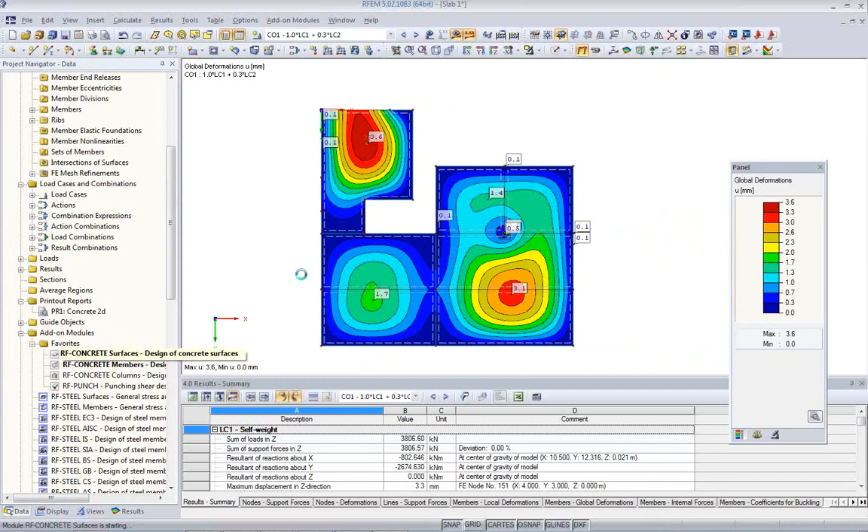Let me open the module one more time. I'll do the following: uncheck this again and not use the deflection module here. Here we analyze the regular results - we can do this quickly. And then I'll copy the case, the same thing, and call it deflection.

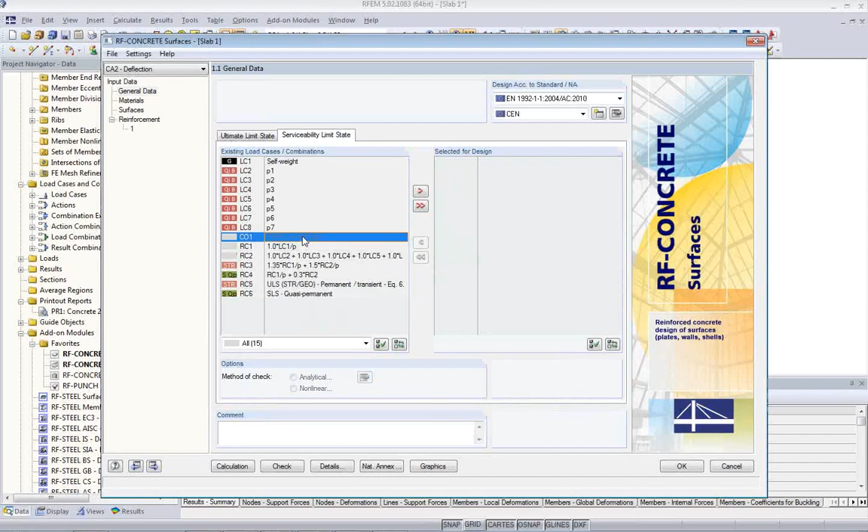So I work with the same settings when I analyze the deflections, and here I said I would like to do the deflection analysis - but not with the quasi-permanent combination, rather with the combination that I just created for deflection. I run the analysis, and now it's a nonlinear case.

At the result, I get a nonlinear deflection, and we can look it up in the serviceability design. Here we see we have a uz,local total of 16 millimeters as the existing value. The limiting value is not quite right - I forgot to set this.

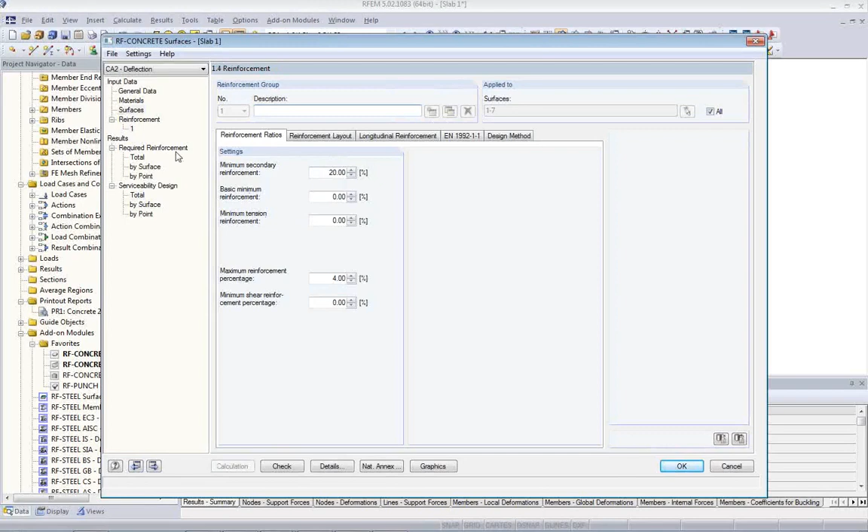When I do the deflection analysis, I get different tables with the deformation analysis, and I can set the limiting value here. I can analyze the limiting value by dividing the maximum length by 250, for example, and pick this distance from here to here. So we're talking about 7.8 meters, and the limiting value will be 7.8 meters divided by 250.

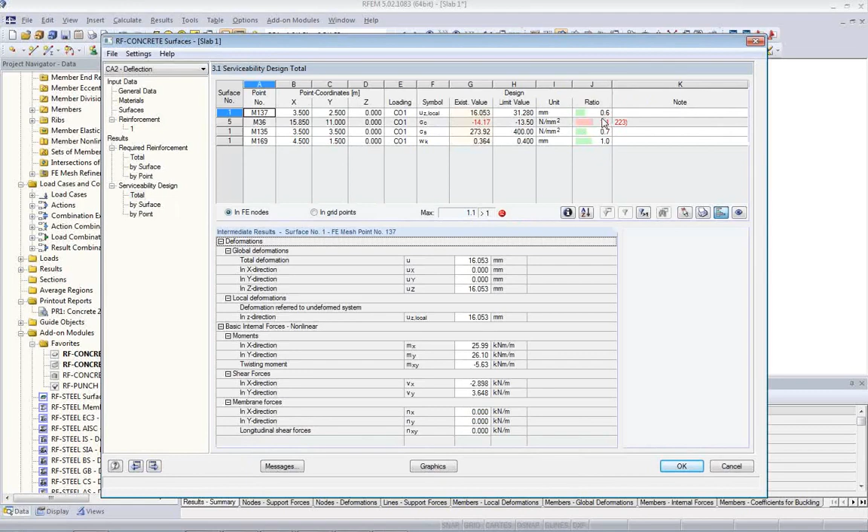When I run the analysis again with this limiting value, we should be quite okay. We see here the required is 16, and the limit is 31, so the utilization ratio is 0.6. And the concrete stress problem is again here at the column.

Which reminds me that I also have to show the punching design that I forgot.

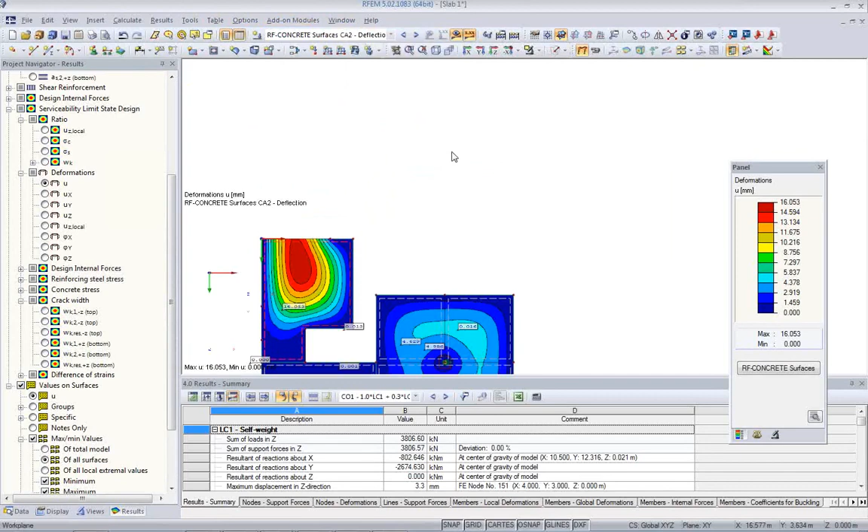Please note that we have the deflection. We can also show this now in the graphic view. Results, serviceability, deformations. We have here 16.

If I show the same thing, maybe in a parallel window, here is the nonlinear, and here will be the linear, which is only 3.6. Is that correct? Yes. So we have almost 4, 3.5 to about 4 times more deflection, between 4 and 5 times more of the linear deflections we have in the nonlinear situation. Okay, this was this question, and then let's take a look at the punching check.

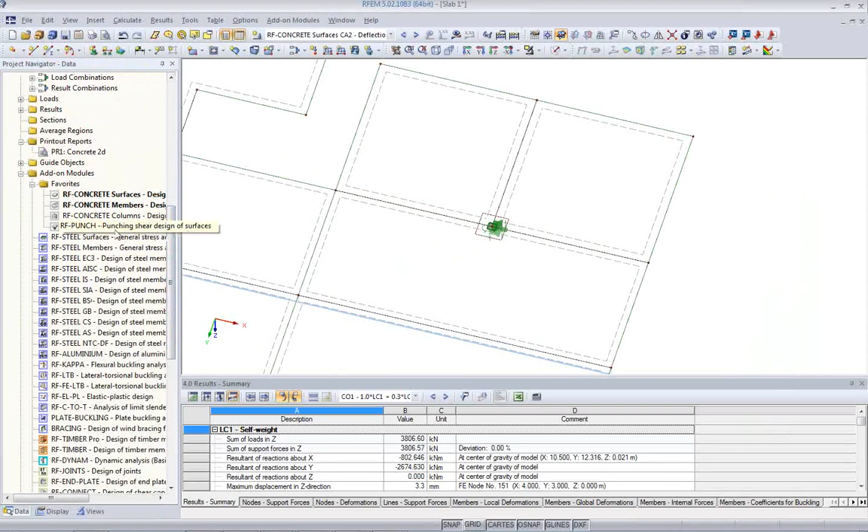We have here this situation where we have a lot of force that is concentrated on this column. With the module RF Punch, we can check this, and this will not take us very long. We'll open it. I'll use the ultimate limit design situation. I use Eurocode again.

Materials, we've seen several times now. A specialty is that I can take into account openings around the point support that will reduce the shear capacity or the capacity against punching. I can enter the location and type of the openings here. We have longitudinal reinforcement that can be defined by the cover and by the direction, and which is now, as always, 0 and 90 degrees.

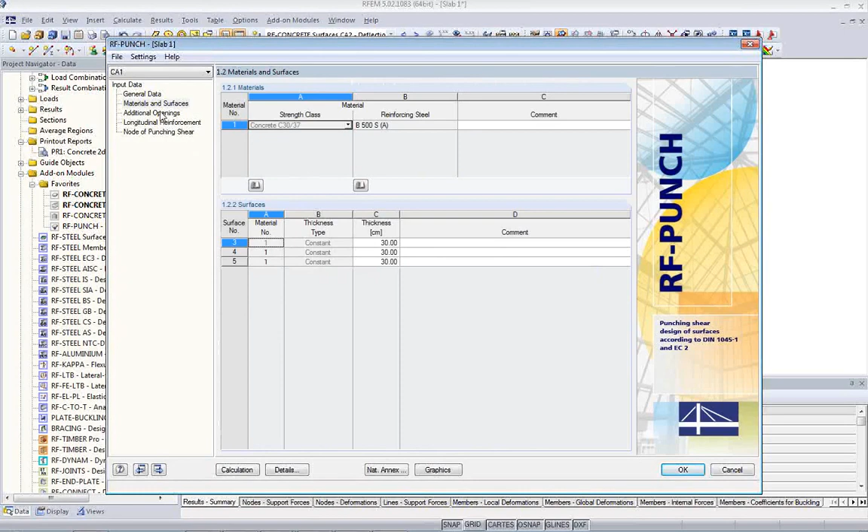And we have here the individual node for punching. It already knows the node where there's just one support, node number 6, which is also set up here. It knows the surfaces that are connected to this node, and I can put here the dimensions of the column.

Okay, I can enter here all the code parameters. I assume the position is somewhat in the middle of the slab. The shear reinforcement should be designed, if so, vertical. I want to get the reinforcement laid out. So it will now create reinforcement first in the longitudinal direction, and if I can provide enough reinforcement that punching is not a problem, it will not introduce any shear reinforcement.

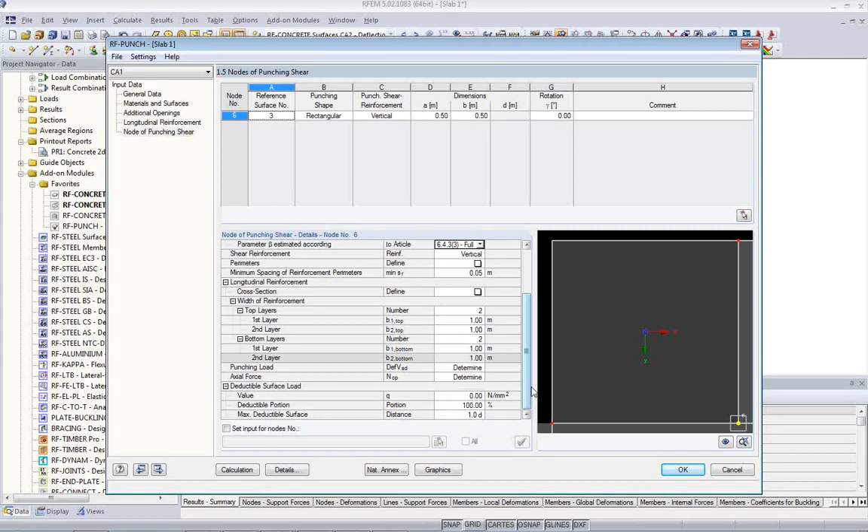Okay, and with this I run the analysis, and I get here a design criterion of 1. And if I look at the details, I have effective... what is it? Where is my reinforcement content? We can take a look graphically as well.

So the applied force is 659 kilonewton with the maximum shear stress, basically. There is moment in center of perimeter in x direction, and all those minimum moments that have to be taken into account are set there. Here's the applied shear force.

925 kilonewtons. The governing punching load is the same, and then we should get some required reinforcement at the end, and actually the design is the resistance for shear and the maximum force which is there, and the criterion ends up then as 1.

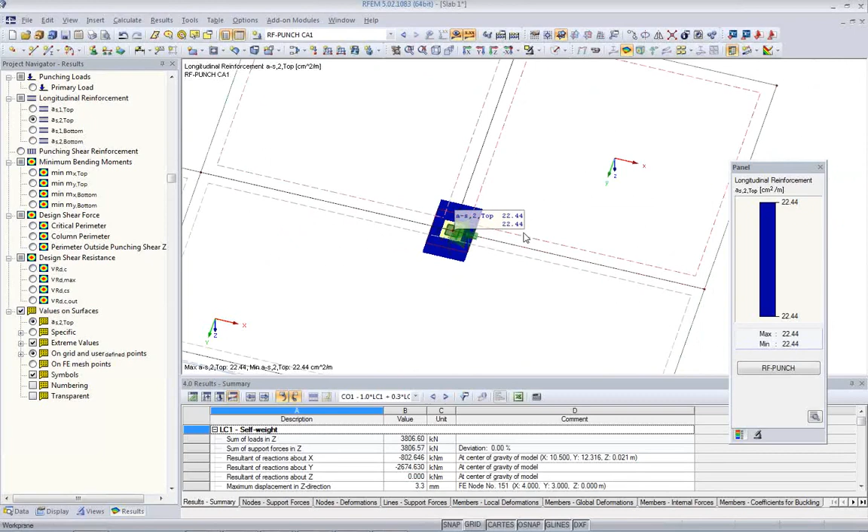If I look into the graphics, I can show my required reinforcement on top, which is 22.4. I can also show again the value. Maybe this time I only want to have the extreme value. Top, the other direction, and I get my values as well here. So this is the punching shear check, which is done in the module RF Punch.